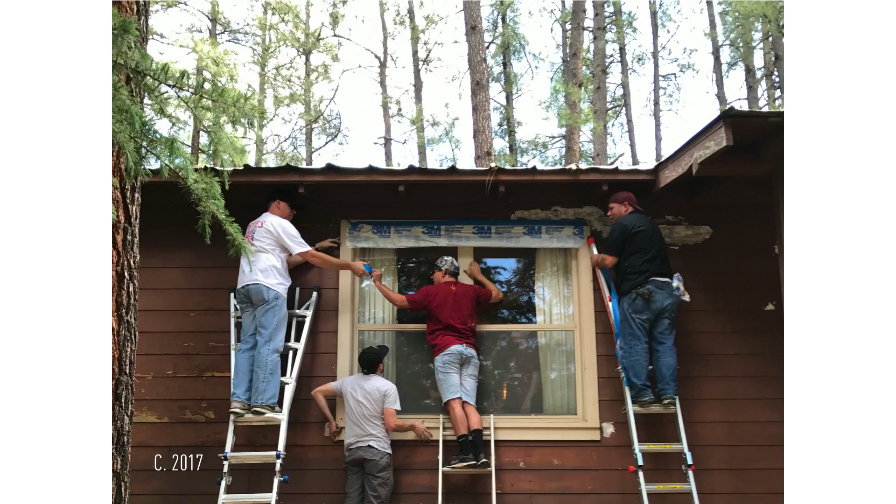This past summer, my cousins and I met at the cabin to repaint the exterior. Lindsay, my wife, and I now take our children to the cabin every summer for a couple of weeks.

As I mentioned, I'm a graduate of Berkeley. While I studied here, I was greatly impressed by the shingle-style architecture in Berkeley, which has excellent examples. It pervades throughout the Bay Area. This is a Julia Morgan that's still, of course, here. I think the ballet actually occupies this building.

I also worked professionally in Berkeley at the offices of Bohlin Cywinski Jackson, an architecture firm that now is in San Francisco. During that time, I was assigned to a residential design project called the Creekside House near Palo Alto. The client's primary concern was to preserve the large 100-year-old oak trees that stood on the property. A strategy to prop up the branches of the tree was designed and implemented. The house tucks under the oak canopy, and the house is framed and lined with timber. These early experiences were instrumental in forming an intuition and technical expertise in timber construction.

And more importantly, however, as we are emotional beings, and I'm probably more emotional than most, as this is a sentimental beginning, this formed the beginnings of my strong belief that buildings should be wood.

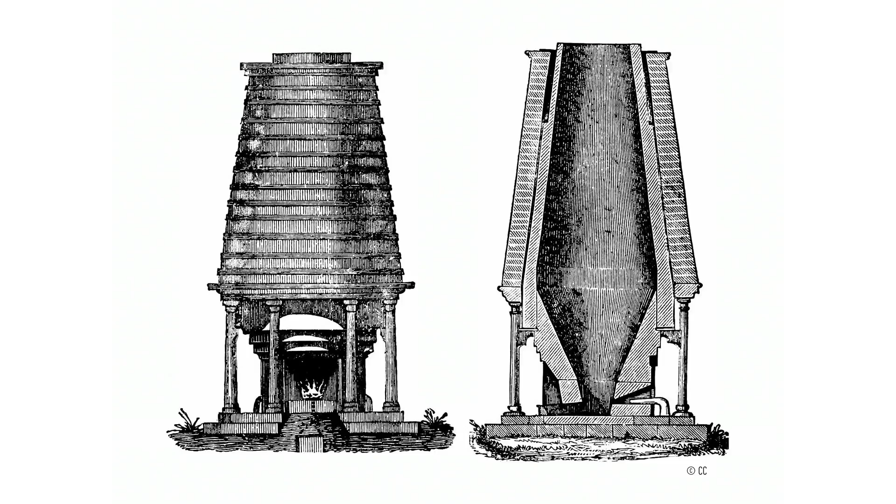But why in the 21st century is it time for timber commercial construction? The Industrial Revolution brought about standardization and mechanization. The blast furnace process allowed for iron ore to be smelted affordably, leading to the mass production of steel, from nails to large structural beams. Steel saws could cut logs, and laborers could nail together boards faster and more affordably than ever before. And light wood frame for single-family houses became favored above brick and stone masonry.

About this time, the process for refining Portland cement, the binder in concrete, was invented in the UK. While wood emerged out of the Industrial Revolution as the material of houses, steel and concrete became the material of commercial construction, favored for their longer spans, durability, and what was perceived as non-combustibility.

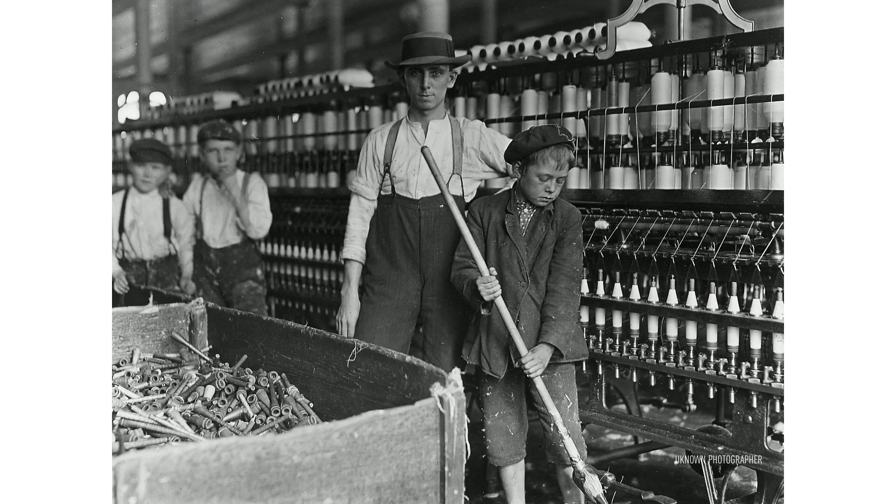However, the consequences of the Industrial Revolution were not systematically or systemically considered. Ulrich Beck, the late German social scientist, suggests that we wrestle today with the side effects of yesterday's successes, that we are in a new phase of modernity today, in which our mode of operation, such as building, can be characterized by the development and implementation of contextual systems of increasing hazard. He says that our belief that society can somehow control the dangers that itself produces is self-defeating.

While steel and concrete can certainly solve performance parameters of building, they have unintended, unknowingly environmental and social contingencies and consequences. We're all aware of the mounting natural hazards. You've been a recipient of one most recently. There's also the tragedies in Texas, in Florida, Puerto Rico.

Given the secondhand effects of the Industrial Revolution, policymakers and those in the building industry, like myself, are for the first time in my memory and in the study of history of building, seriously considering not only the operational performance of buildings, but the impact of material selection on climate change mitigation. This awareness has propelled timber to the forefront as an innovative construction material of the 21st century among ecologically conscious owners, architects, engineers, and builders.

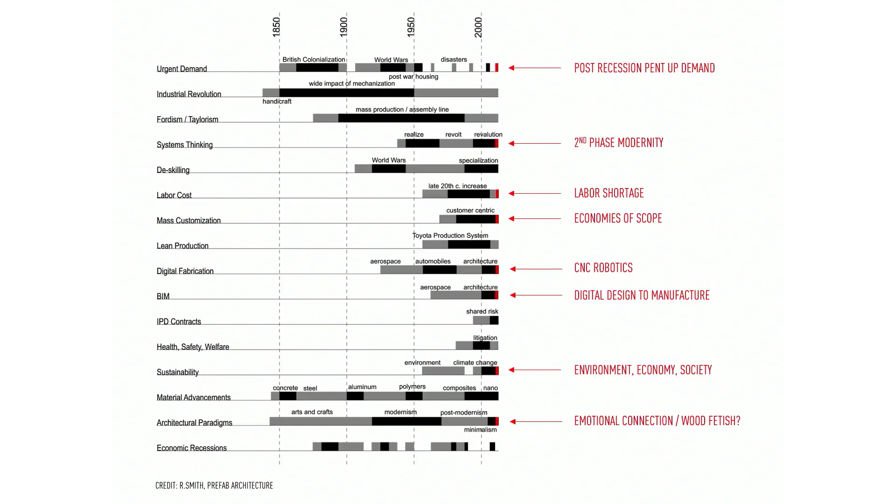And finally, and I think probably most importantly, we as emotional human beings are tied to aesthetics and other sensory components. And so I think one of the major reasons that wood is pervading is because architects seem to currently have a wood fetish. This is also dangerous because we had a concrete fetish in the middle of the 20th century. Where this will lead, I'm not quite sure.

I run a research center at the University of Utah, as the dean mentioned. We focus on how buildings are built and the contingent social and environmental and economic implications of such. This has led us to wood and industrialized building as two primary topics.

The center at the University of Utah is located in Salt Lake City, and due to the influx of high-tech companies such as IM Flash, Adobe, and yes, the US National Security Agency, coupled with the reality that much of the population stays in Utah and reproduces prolifically, the Salt Lake Valley is one of the fastest growing regions in the United States.

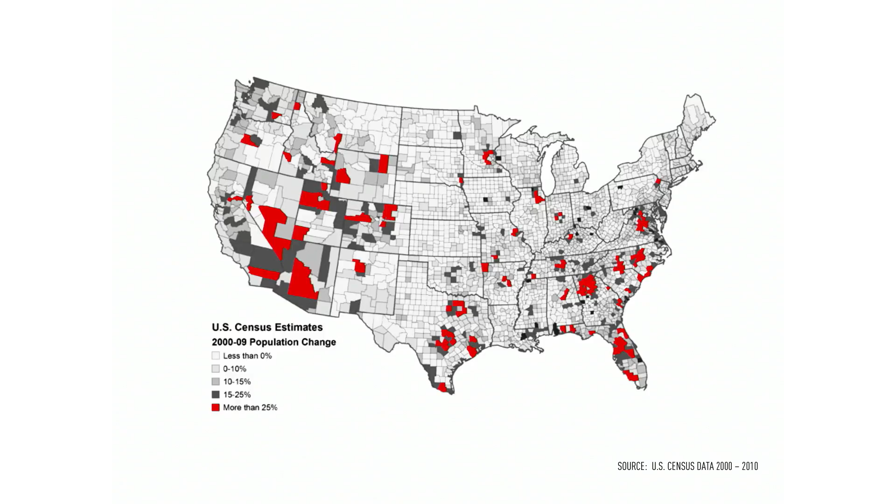It's estimated by 2030, the number of housing units in the Salt Lake Valley will double what it is currently. Housing trends indicate these 750,000 units will come by way of low-rise multifamily apartments, condos, and affordable housing projects. This presents all kinds of planning and development questions, challenges, and opportunities, not the least of which is, how will these buildings actually be built?

We explored the potential of construction materials that were currently not recycled or reused that perhaps could be used in that way. This brought us to the Utah State construction and demolition waste data. These numbers from 2008 demonstrate that concrete and mixed concrete rubble constitute the majority of construction and demolition waste in Utah by volume. Outside of crushing concrete into aggregate or pulverizing it into road base or road refines, it's really difficult to reuse. Metals, including steel, are already recycled nearly completely, nearly 100%.

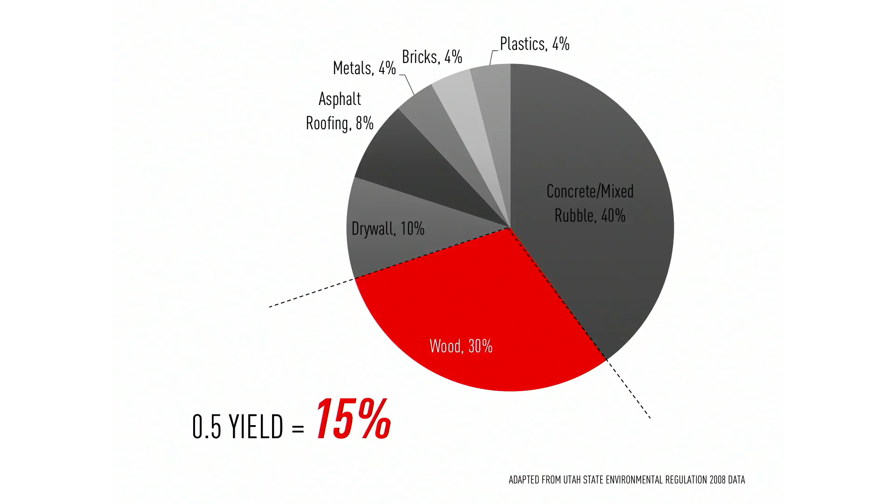Wood is the only other structural material option currently in that waste stream. Research precedent indicates there's a 0.5 yield on recycled wood, meaning that of the wood volume going into the landfill by virtue of demolishing old buildings, only about half has historically been able to be reclaimed and reused functionally. But the literature only showed case studies of reuse for wood in finished applications, such as wood floors, cladding on the outside of buildings, or wood lining on the interior. There were no examples of using it as a structural material.

Even if wood is not recycled, such as using new virgin material, it really is the only rapidly renewable material that could be used as a structure. Wood as a raw material brought to use is a relatively low embodied energy material. This means the amount of energy imbued in the material during harvesting, processing, and transport is low compared to, say, metals. This is positive because energy in this country is primarily generated by coal-fired power plants, which presents a challenge for both pollution and CO2 greenhouse gas emissions, linked to climate change.

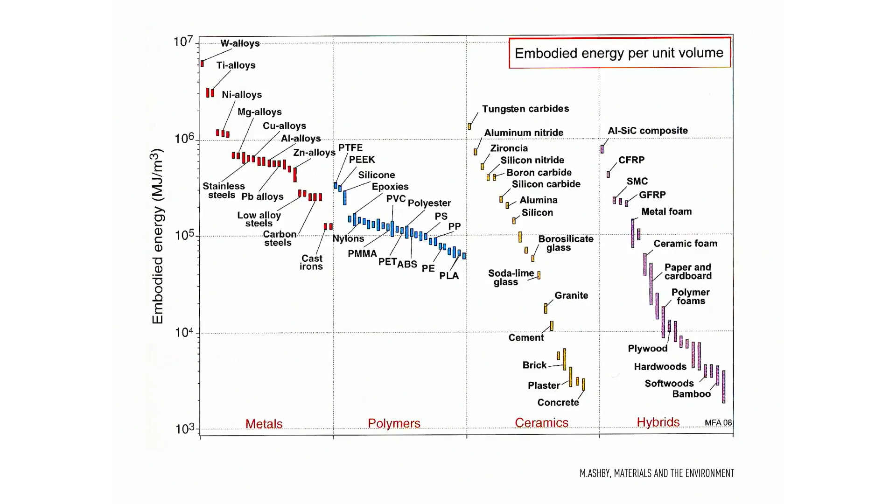You can see that wood is also a low embodied energy material, but that does not account for the carbon sequestration that occurs during the growth cycle of trees. Bruce Lippke, a colleague at CORRIM at the University of Washington, has dedicated his life to working out life cycle assessments in wood. He's compared this to other materials, such as concrete. This image shows the net carbon emissions of wall assemblies, illustrating that wood is a net carbon sequesterer.

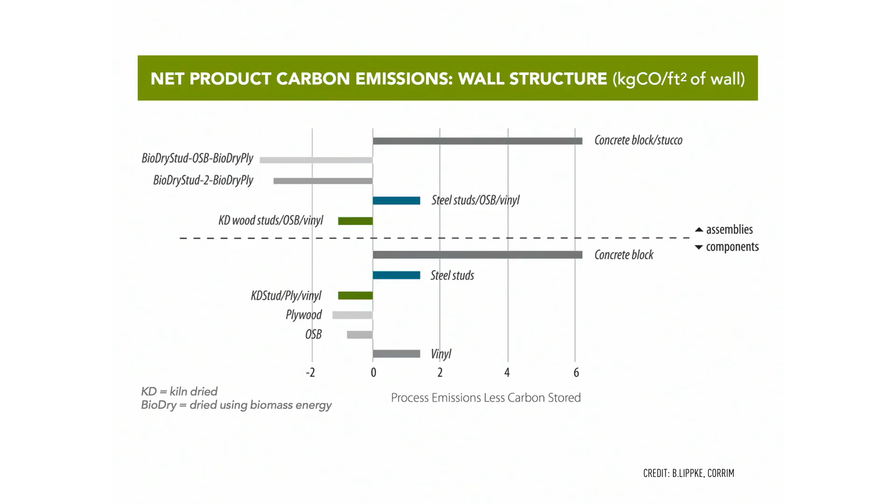Because timber has low embodied energy, is net carbon sequestering, and can be reused and recycled, we became interested in a product that could take some of the deficiencies of construction and demolition waste, or underutilized wood in general, and increase its capacity, such as structural capacity or durability, by reconstituting it into a value-added product. One product, cross-laminated timber, has been in existence for some 20-25 years, emerging out of the Technical University in Graz, Austria.

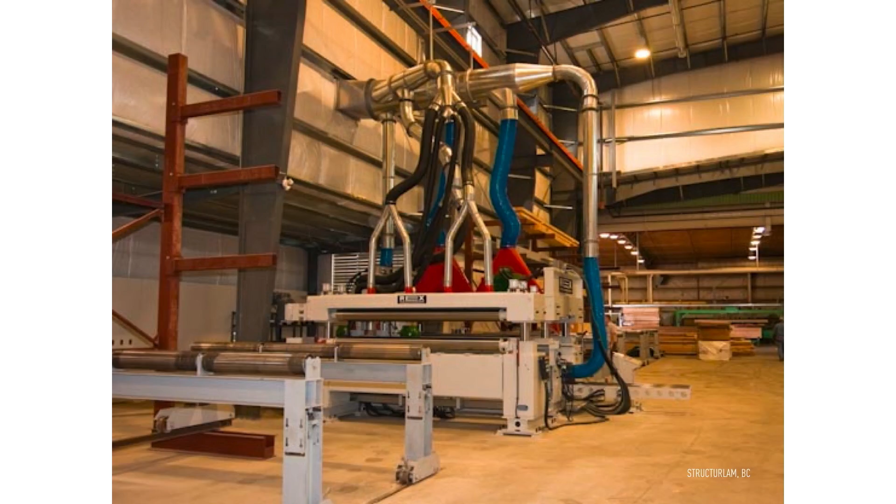Developed by Dr. Gerhard Schickhofer, we could theoretically reuse waste wood in the construction demolition stream into this new product by glue laminating it into rafting layers, such as plywood, but using dimensional lumber sizes. But this presented challenges with the initial cost of glue laminated presses and the capital expenditure investment of large format planers and sanders that the wide majority of timber fabricators across North America do not have access to.

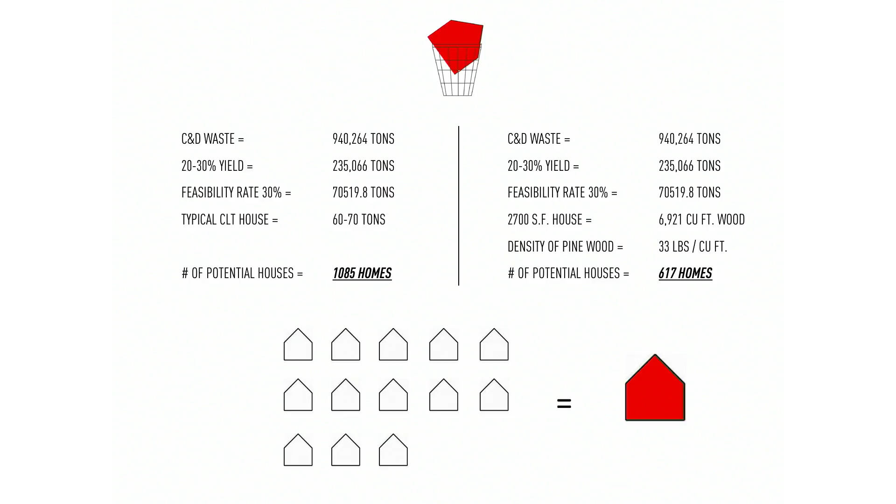Furthermore, there was a challenge of actually creating a wood reuse supply chain. We estimated it would take an average of 13 homes demolished to create one cross-laminated timber house from construction and demolition waste. This is calculated both in mass and volume. So in any given year, the market would only be able to build about 600 to 1,000 homes from the construction demolition waste going into the landfill. This really didn't meet the demand of the 2030 benchmark in Salt Lake of needing to double its housing stock.

In 2009, we learned of the mountain beetle problem in the Intermountain West forests. This was also a waste wood that, like construction and demolition waste, was an opportunity to make lemonade out of lemons, to add value to what otherwise was unused. Now certainly beetle-killed pine can be used for biomass, but in our estimation this is a lower value use of the product. We began exploring the opportunity to create a structural building product like cross-laminated timber, but at a lower cost for entry for timber fabricators that did not rely upon expensive machines, such as presses and planers.

I'm sure you're all aware, probably much more than I am, about the mountain pine beetle devastation that occurred. But just to remind ourselves, it damaged most of the intermountain forests. California was not immune to this.

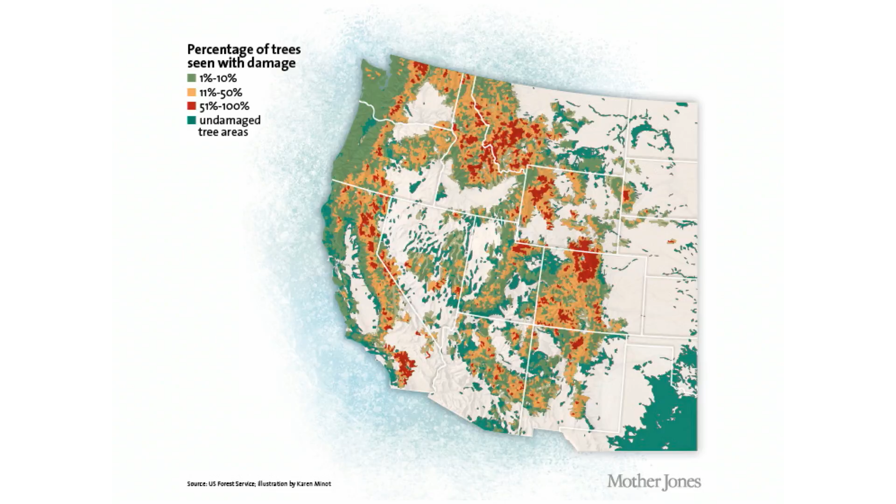We know that bark beetle infestations are exacerbated by longer mating seasons and warmer temperatures that dry out forests. Although the mountain pine beetle epidemic is slowly subsiding, according to Colorado State University, the spruce beetle is now kicking up. We estimated that the amount of forest infected in Colorado alone would produce over 2 million housing units, well over market demand, which could help meet the rapid population expansion in the Intermountain corridor.

We could also aid the Forest Service in removing standing dead trees and create value for the forest sector. At the same time, Euclid Timber, a local fabricator in Provo Canyon on the back of the Wasatch Mountain Range, was exploring mass timber products and logging beetle-killed standing dead material from local landowners' properties. They invited us to participate in their R&D and testing as a university partner, along with Brigham Young University and Acute Engineering, a timber engineer in Utah.

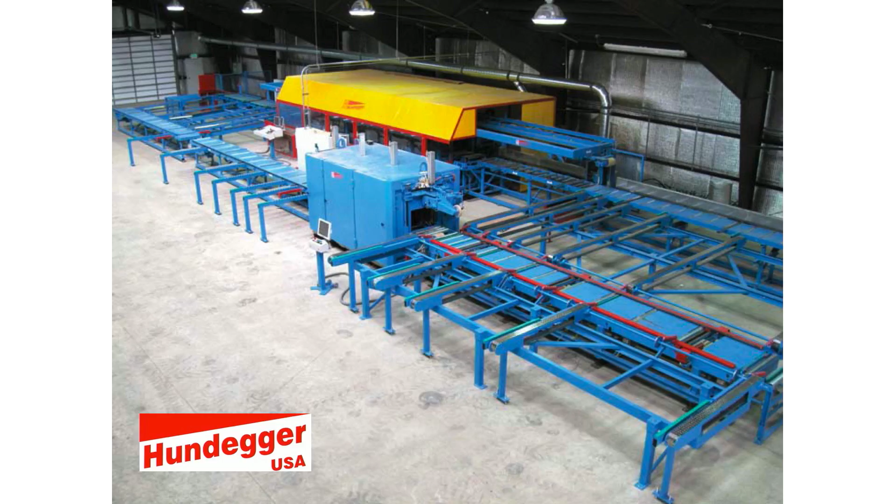Euclid Timber's owner, Kip Apostel, speaks German and is well connected to the Central European wood building industry. He also owns a co-located Hundegger USA on the same property. Hundegger is the Rolls-Royce of CNC wood fabrication machines. In addition to having these tools in their shop, Euclid/Hundegger retails, supplies, and maintains Hundegger machines throughout the United States.

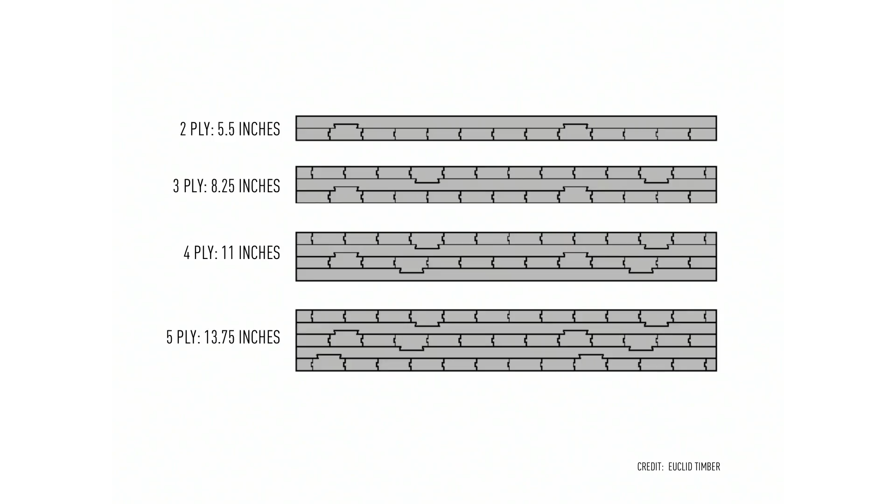The team developed a series of interlocking cross-laminated timber, or ICLT, wall assemblies from 2 to 5 layers, 5.5 to 13.75 inches in thickness. Like CLT, the system uses rafting layers of alternating beetle-killed pine lumber, 3-inch thick boards air dried to about 10 to 12%, plus or minus 2%. The boards are then tooled with a dovetail notch so each layer nests into the next layer.

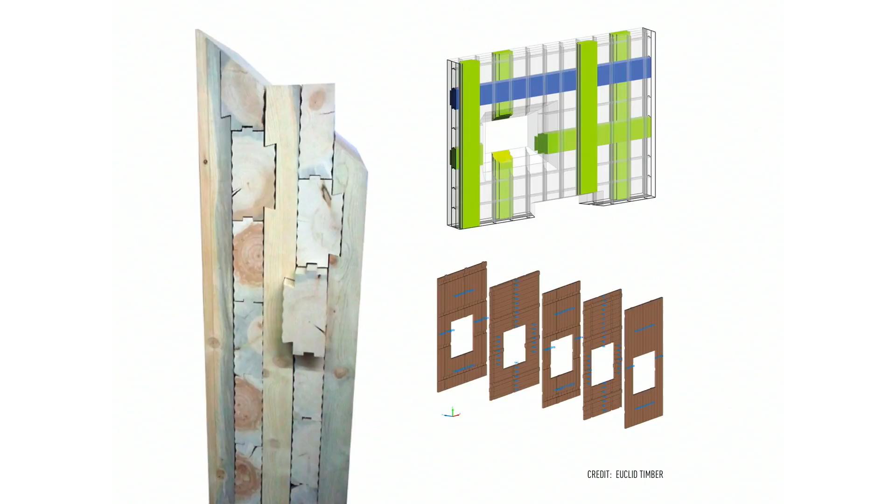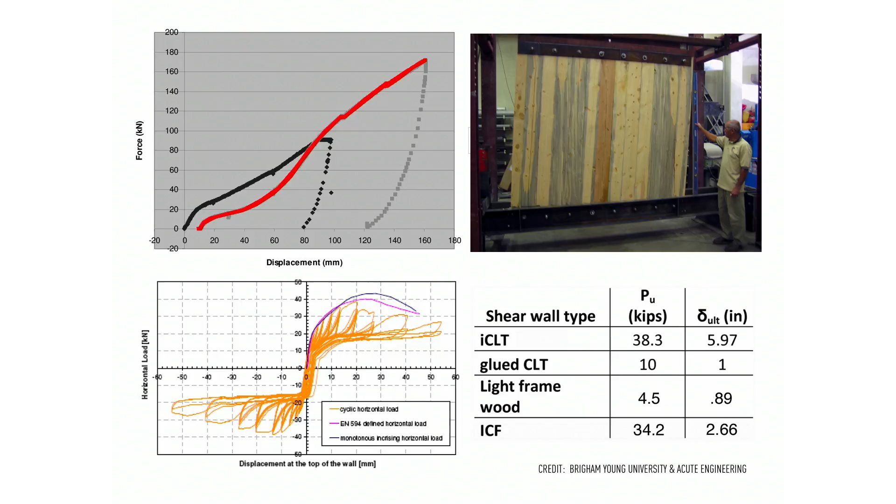The ICLT walls were tested at a pushover actuator test at Brigham Young University, serving a number of civil engineering master's thesis projects. The walls perform similar to reinforced concrete for lateral resistance, but have a large deflection. This would serve well in high seismic or wind zones, meaning it's safe for egress, but the finish damages occurring in the event would cause economic problems, such as cracking of sheetrock.

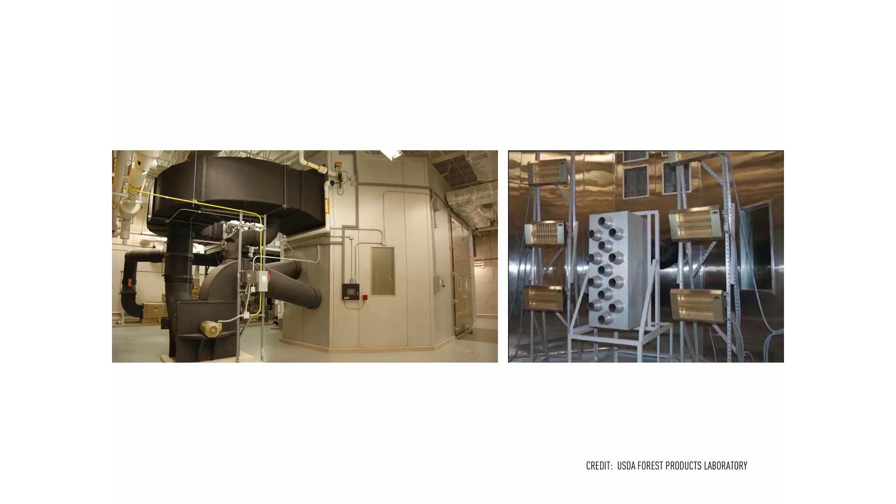The walls have also been tested at the USDA Forest Products Laboratory in Madison, Wisconsin, with the help of building physicist Sam Glass. The facility is known as the car wash. It's a weather and temperature simulator whereby the wall element is a mediating surface between simulated weather and interior environment. Sensors monitor relative humidity and temperature, and the appropriate architectural detail is to conceptually capture thermal mass of the wall to the interior.

We tested both vapor-open mineral insulation and vapor-tight insulation, such as polymer-based extruded polystyrene, on the exterior surface. Our hypothesis was verified that, similar to CLT, ICLT needed vapor-open insulation to allow the wood wall to breathe. We also discovered that while CLT with adhesives is able to resist air infiltration, ICLT without adhesives needed an air barrier. Without it, no amount of mass or insulation would matter for its thermal performance.

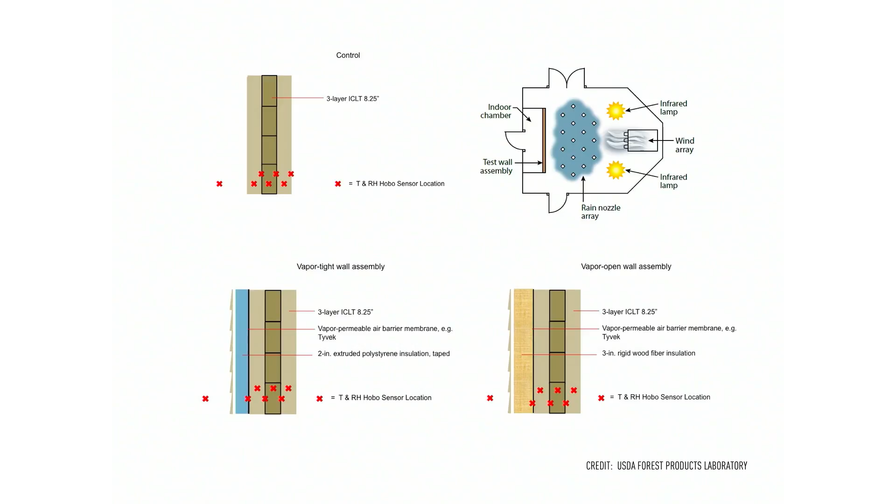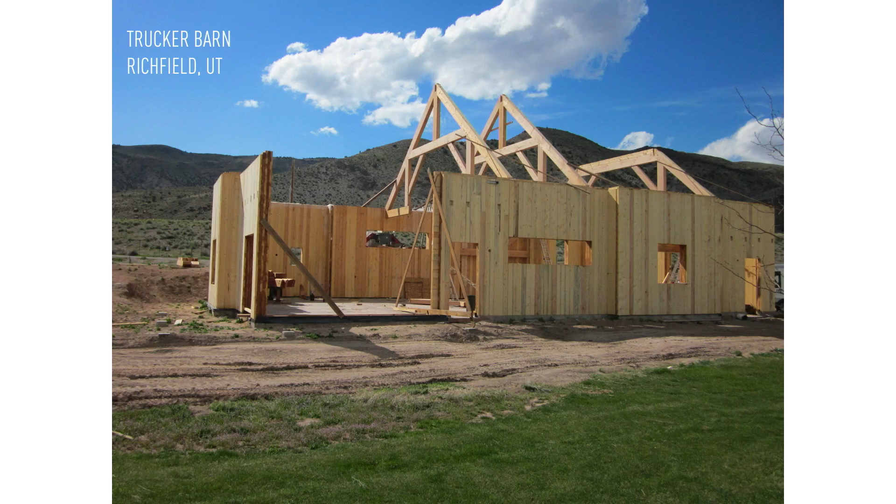Once the hygrothermal testing was done, a lot of these projects were built, and I'll go through a few examples. This is a trucker barn—a funny, slightly counterintuitive story. A trucker on a major highway in Utah wanted a place where he could park his truck and live, and there's a golf course next door.

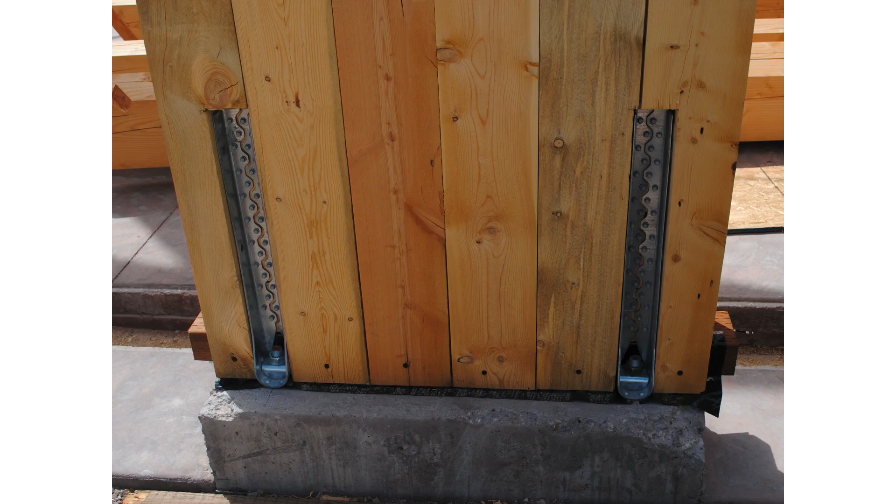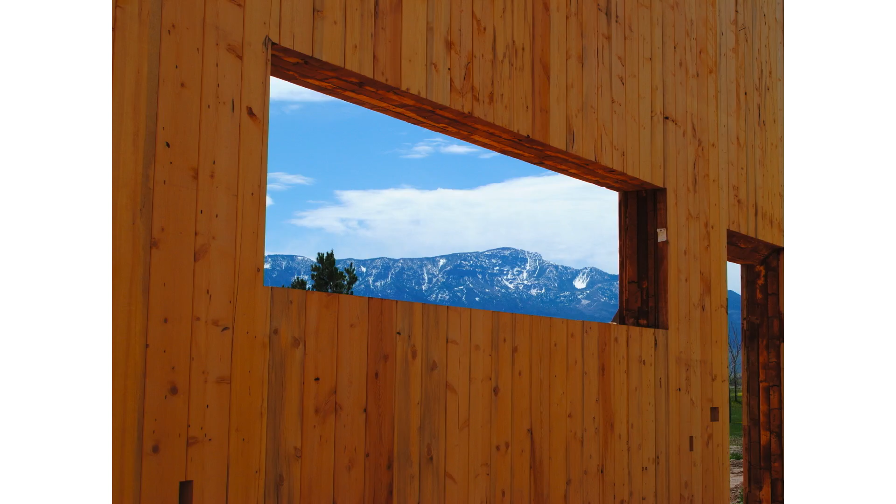These are some of the hold-downs for the wall panel. You can see there are no posts, as you would see in standard construction where you engage a post—these are just drilled directly into the wall. There's no header over a window; you just place the dovetail joints or notches on the layers over those openings so they can span over large openings. You can see some of the trusses, and in this case Euclid Timber developed what's called a dowel laminated panel for the roof, which I'll describe later.

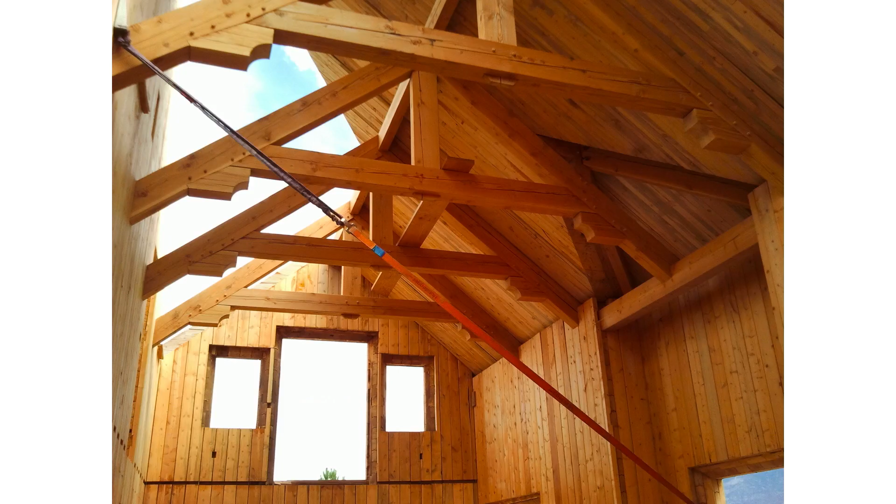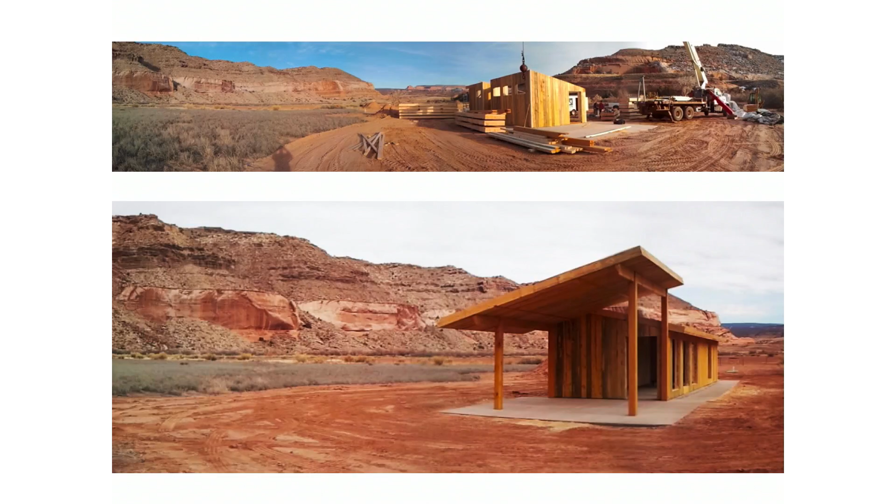This is a project down in southern Utah near Moab called Rio Mesa Center. I served as its research director for a few years, trying to get other disciplines engaged. It's a biological and natural sciences research center. They have tents you can stay in, but there are no bathroom facilities, so we were charged with coming up with this idea, in partnership with an architecture firm and a construction company. Euclid Timber was able to fabricate and build this bathhouse, which holds 3 showers, 3 toilets, and a sink facility.

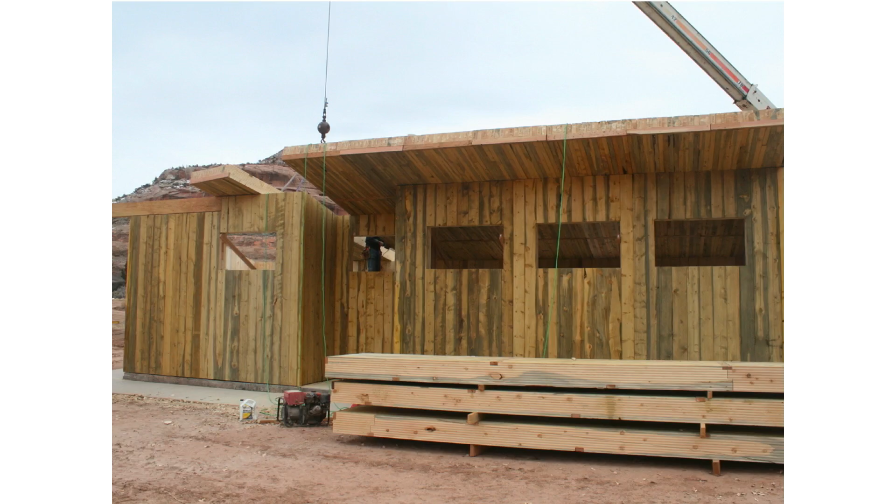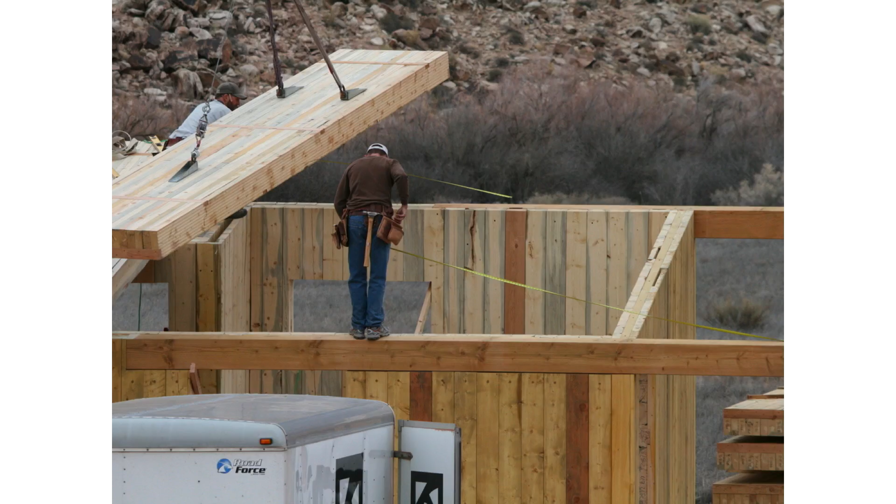You can see it's beetle-killed pine. We then did a water-based clear lacquer on the outside so the wood could still breathe, and furred out on the interior to house all the plumbing while leaving the wood structural panel exposed on the exterior. This is an off-grid project, so all the water, solar hot water, and power come through the roof. You can stay there for $20 a night if you want to—it's in the Red Rock country of Utah.

Project for the Girl Scouts of Utah. This was with my colleague Jörg Rügemer and Erin Carraher, who were designers on the project.

The idea was to engage the Girl Scouts in a meaningful activity so that we could increase our diversity in the Utah population among the building disciplines. It's a major issue for us.

So we engaged the Girl Scouts in the design of their cabins for their camp, and the girls came and participated in quite a few events. One in particular was called the Architecture Chicks event, and they all got t-shirts and got to participate in bringing their sleeping bags to our gallery space, laying out in them and seeing how they might occupy space by taping it off on the floor.

We call this bricks and sticks, where they get to think about loads from a building and how wood might deflect. And then there was a panel discussion with some of the prominent women architects in our community.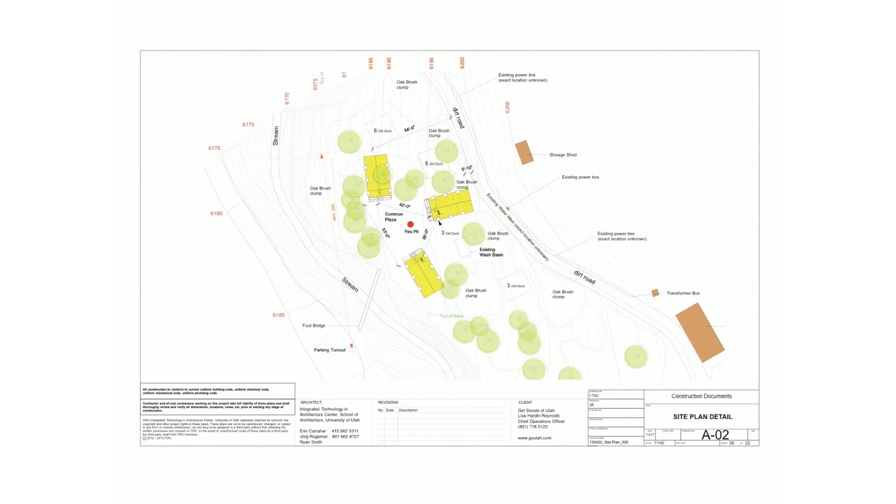We took them to the Euclid Timber Factory, and the girls got to see how wood was manufactured and fabricated with the Hundegger machine. This is the design of the project, 3 cabins built to date.

It's designed in cadwork, which is a timber modeler. All the components and parts are designed that way, and then they're fed to the machine digitally, and the machine then cuts them. This is a little bit unique panel.

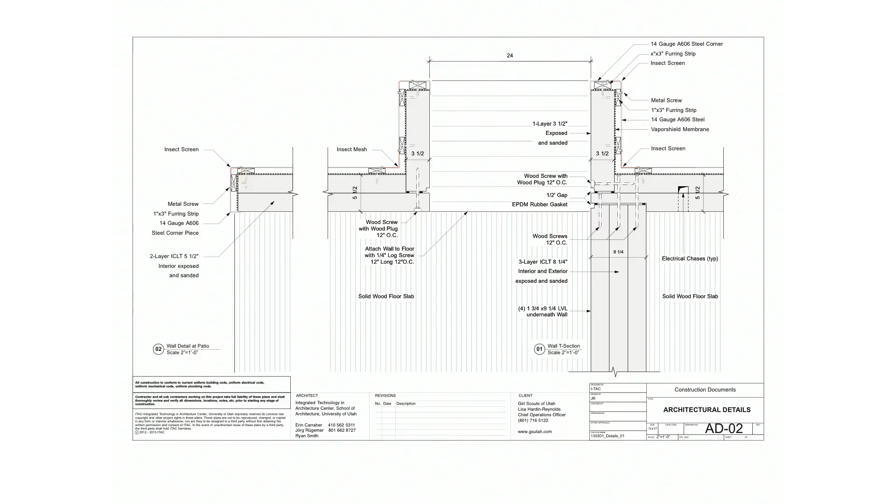It was a 2-layer panel, and you'll see how the construction kind of worked. This is a summer cabin, so it has no insulation. It's only used during the summer.

The walls sit down on top of the floor through this dovetail joint.

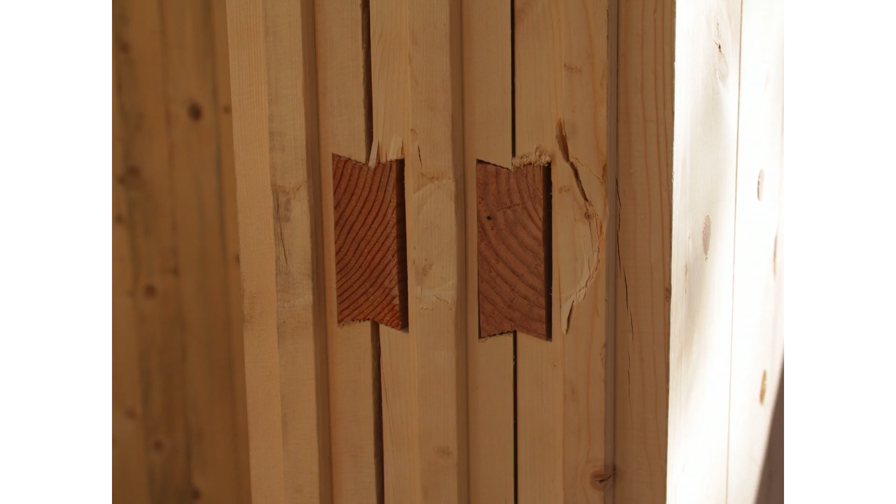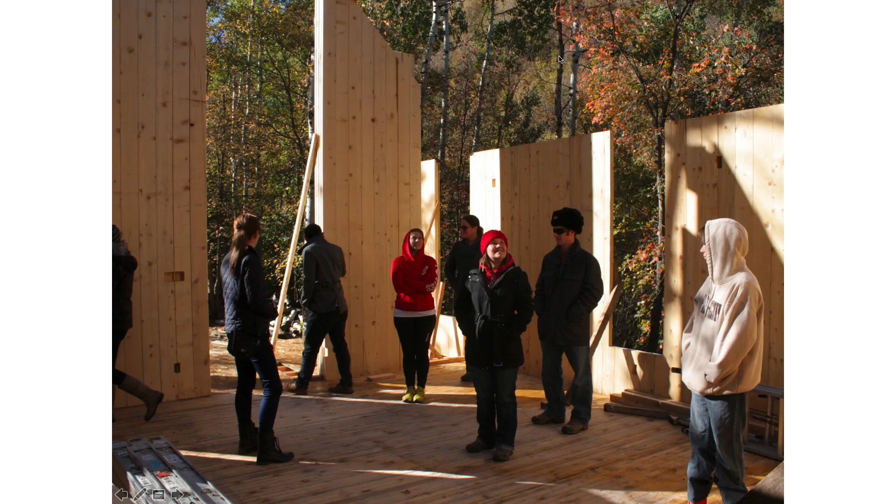And then it's a little bit different twist. It's a bow tie notch that's driven across those 2 layers of panels. So you have 1, 2, and then it's driven across to, in that case, those are 3, but we have 2 and 3. Here's some of the architecture students visiting the job site.

Getting firsthand knowledge of how mass timber construction works.

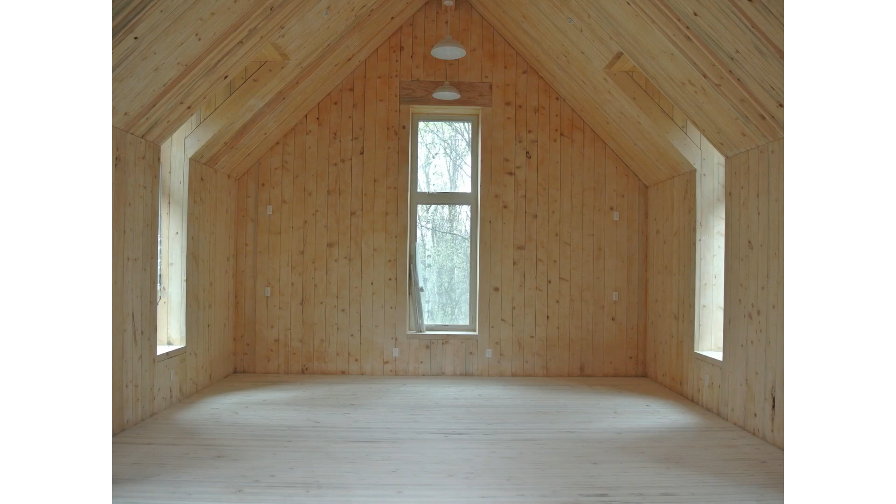We did have some problems with pitch, but I won't go into that. The wood didn't go through a full seasonal cycle of drying, so we had some problems with pitch. It was just clad with a simple mild steel and a weather barrier between them.

My son, when I took him to this project, he is a Boy Scout, and he said, "This is just not fair."

You can see how many girls can fit into a cabin, and Erin Carraher led a studio where they designed all the seating and tables for each of the cabin meeting spaces in the center. So the architecture students built those as well.

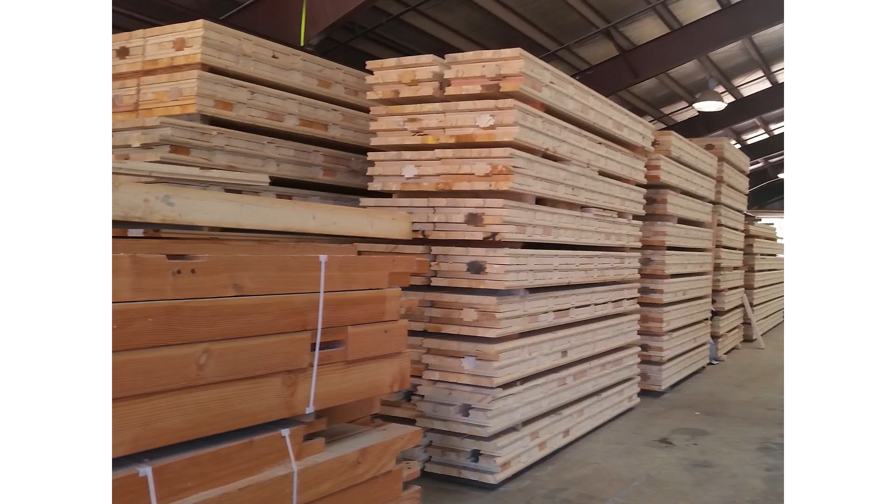Euclid Timber currently holds patent and license on the product, and this is their process. They now produce 2.5 width, what they're calling billets or blanks, and you can order them mass produced, and they stock them so they can supply them.

ICLT is part of a family of glued and non-glued mass timber products. This is kind of an image we produced to explain it to people. On the top you have glued products, glue laminated timber, we're all familiar with that. Structural composite lumber, which could include LVL or PSL, and then cross-laminated timber.

On the non-glued side, these are less familiar to people. A product that came out of Germany is called dowel laminated timber. You dry the hardwood dowel down to a very low moisture content compared to the base wood that it's accepting. You drill through, and then when the ambient relative humidity increases, that dowel expands and locks the panel into place.

This is called nail laminated timber. Similar concept, stacked planks, and you nail through them, usually with aluminum nails. Cross nail laminated timber is the same, and that's because then you put it on a flatbed machine, and you can CNC cut windows out of it and just go right through the aluminum nails. And then the ICLT is the product we developed that has no mechanical fasteners or glue.

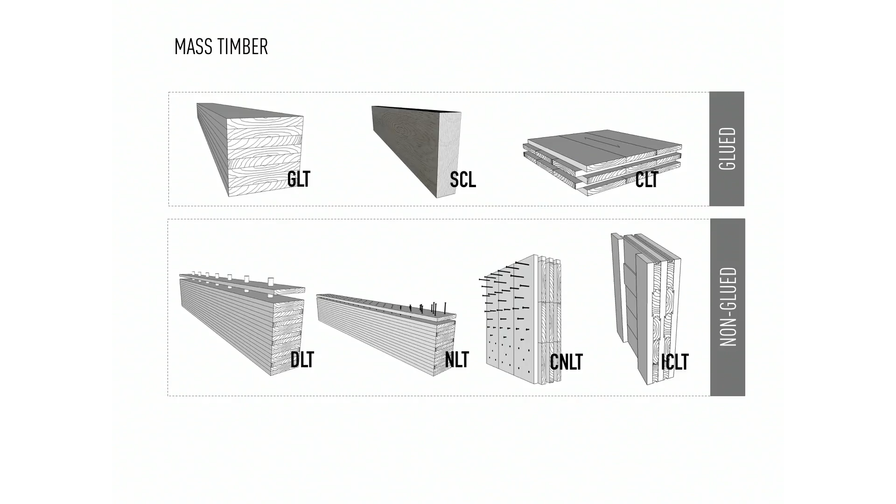Currently, there's about 40 CLT plants that dot Central Europe. There's only 2 producers in Canada of CLT, and we have 2 in the US with another 2 being planned currently. Dowel laminated timber - I don't know how many are in Europe, but in North America we have 2 producers, Euclid Timber in Utah and StructureCraft up in Vancouver. There's a couple of nail laminated timber producers as well.

Hundegger owns the patent on cross nail laminated timber, and they have a specific machine they produce. There are about 20 plants across Central Europe that just produce CNLT product.

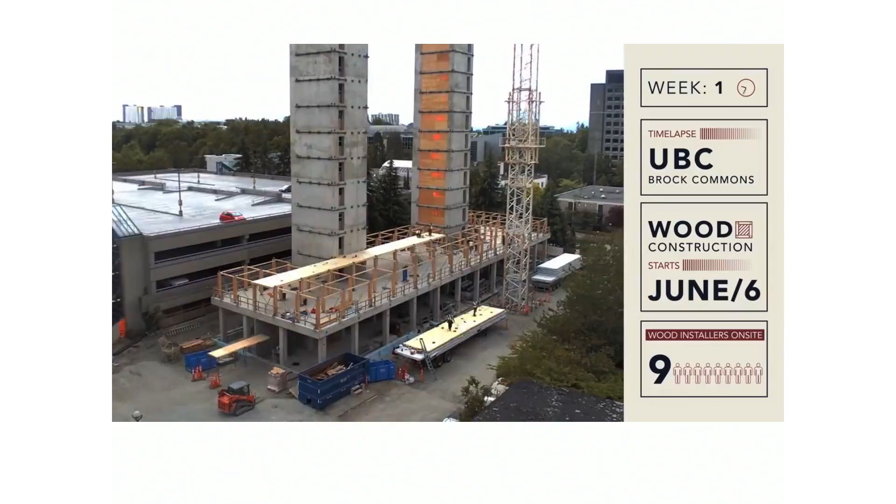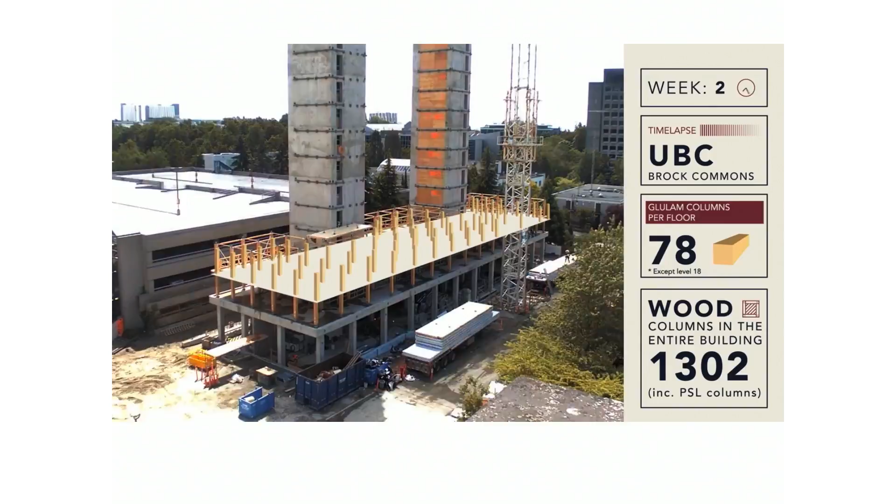If you aren't familiar with cross-laminated timber and where this is going, this is the 18-story project just finished in Vancouver, built out of a hybrid. It uses glue-laminated timbers for the columns and posts, and cross-laminated timbers for the floors. This went up 18 stories. You can see how fast this is - we're in week 2. This is incredibly quick.

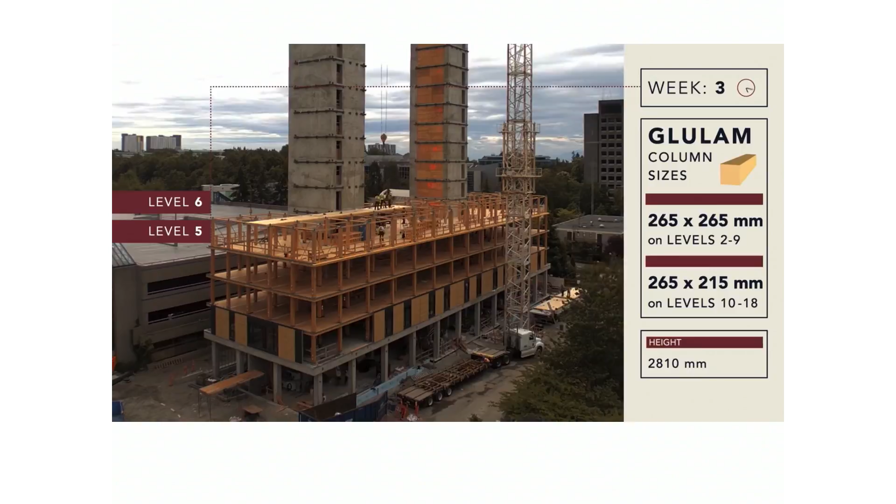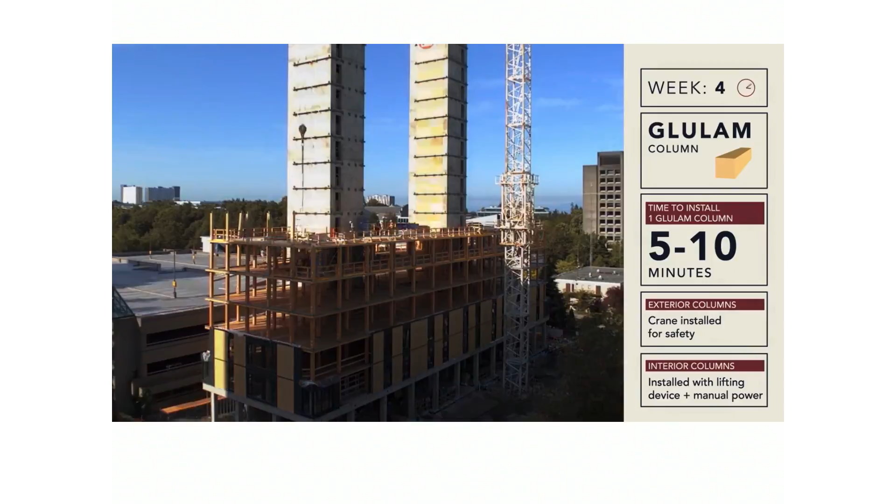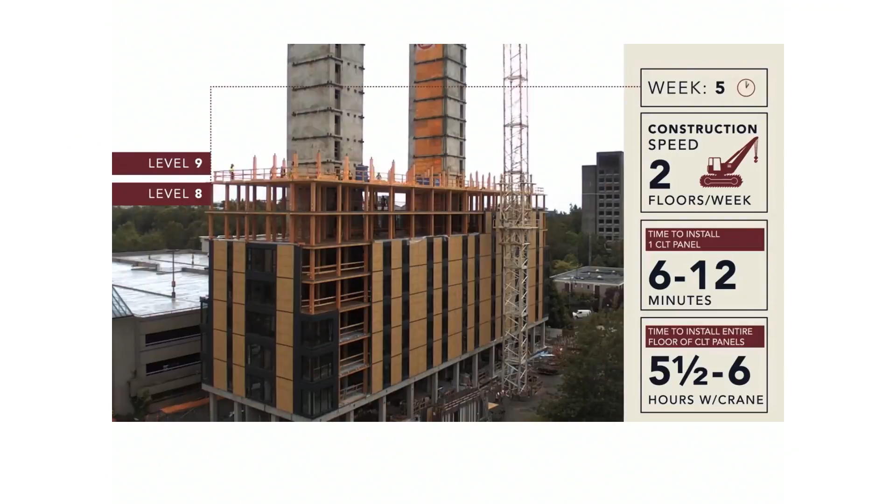So this is the reason people are going this direction. This product comes out of Structurlam, located near Vancouver. This is built for UBC, University of British Columbia. I just got an opportunity to see it two weeks ago, finished. It's pretty incredible - not just is all of this prefabricated, those two stair cores are site cast concrete. That's where the elevators and stairs go. That's for lateral resistance and also fire resistance. And then the whole exterior is a prefabricated cladding system that has embedded windows in it.

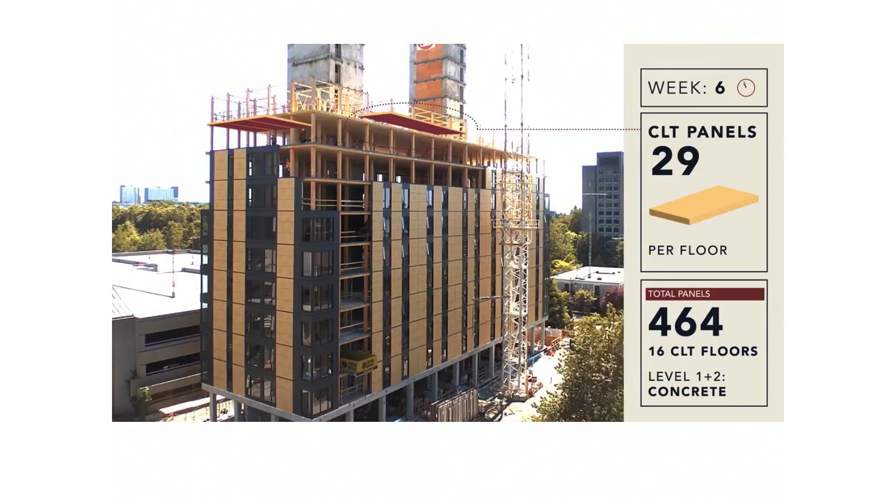I got an opportunity to interact with the superintendent on this project, and she had some great stories to tell. It's highly collaborative between all the players in the project to make this happen.

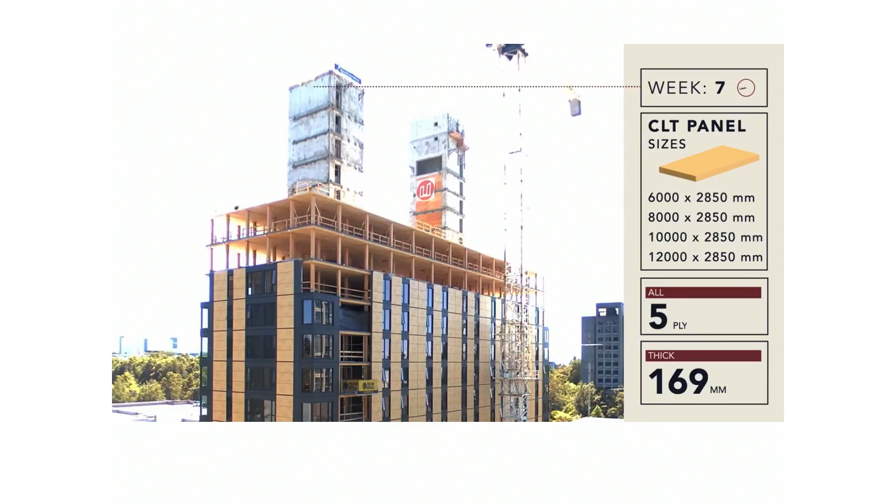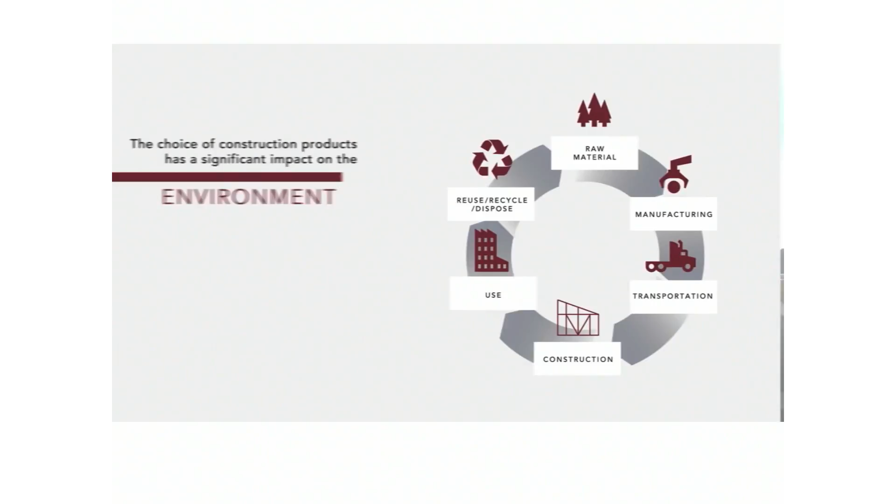I think there's a 17-story project being planned for Portland right now by Lever Architects, and so we'll see much more of this in the US.

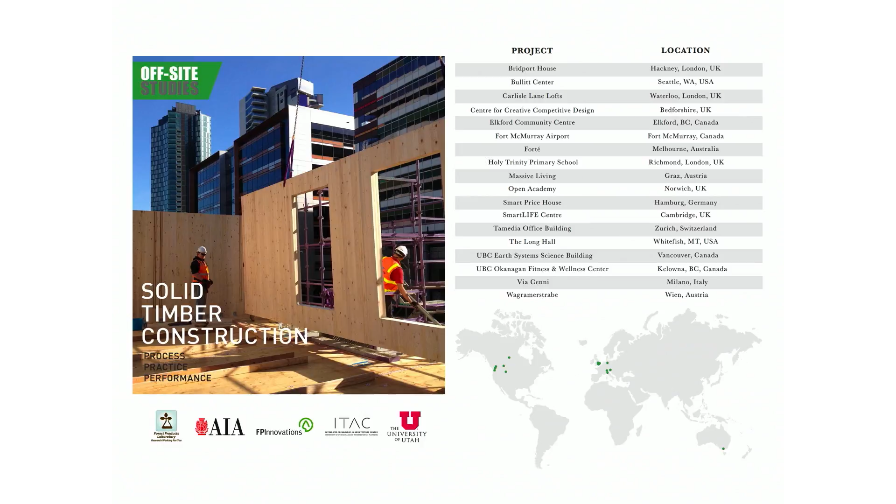We were interested in this product CLT from a kind of research market study perspective. So we took 17 projects, spent 3 years, and documented how they performed - solid mass timber projects - and we compared them against like-for-like developed a system with Cummings Corp, who's a cost estimating firm out of DC, like-for-like projects with these projects. And what we were able to then compare is how they compared in cost, how they compared in time to speed to delivery, cost per square foot.

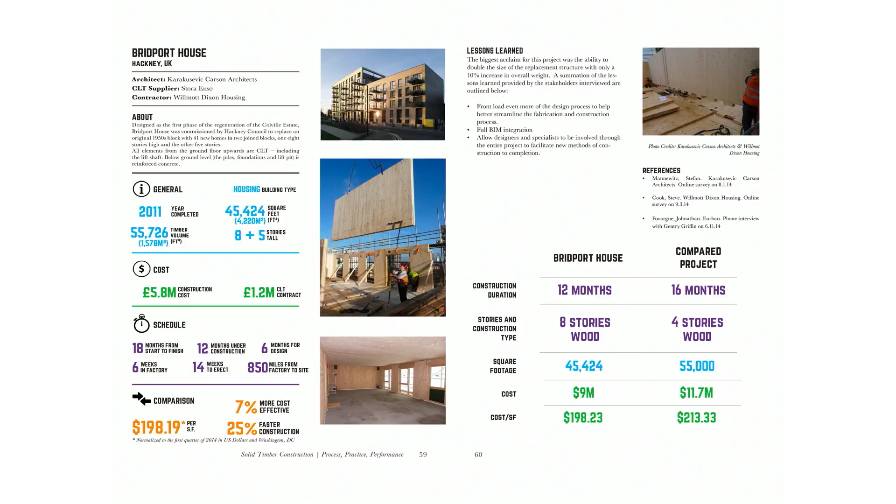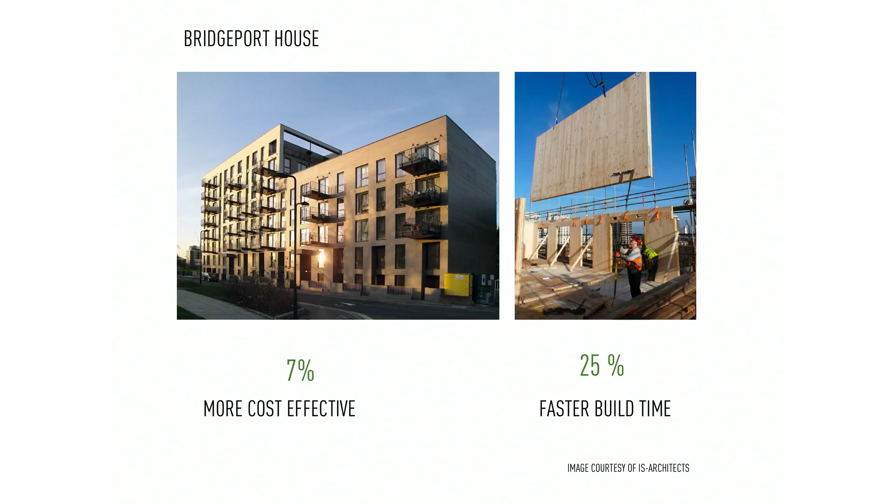What we found across this, for example, Bridport House in the UK was 7% more cost effective than what the industry is building and 25% faster build time. We then broke it down into a number of parameters - you can see the schedule, the number of stories, the amount of square feet. So it does perform quite well.

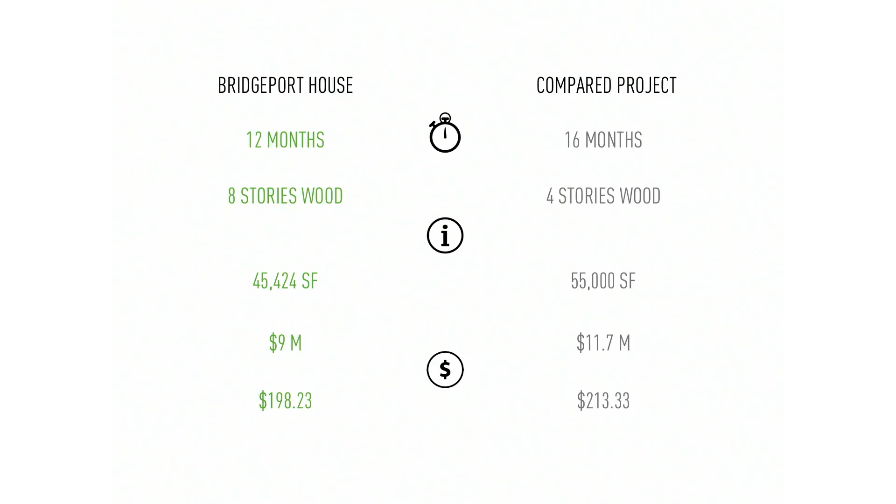The caveat or the limitation in this study is we talked to building stakeholders - we interviewed the architect, we interviewed the fabricator of the CLT, and we interviewed the general contractor to try to triangulate the feedback. If you had a project that went under and did not do well, would you share information? So this is the challenge we had - we got information that we had available.

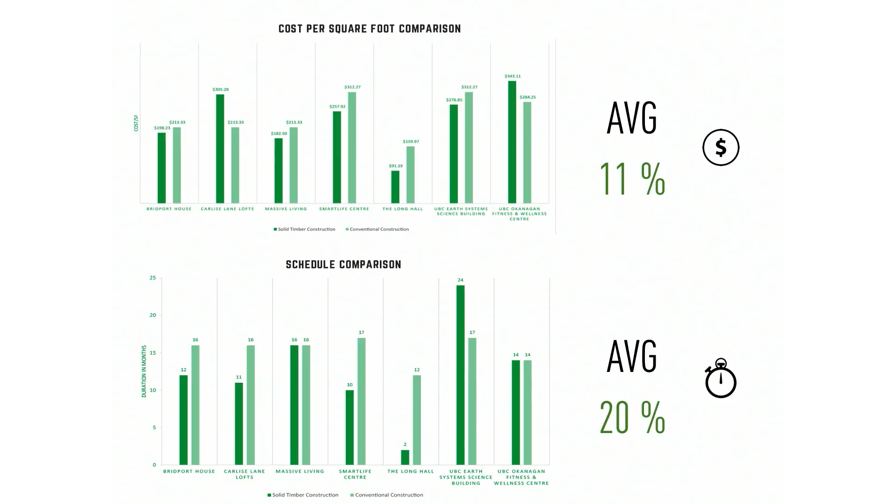Across all those projects, we found about 11% average cost savings, better on construction costs, and 20% schedule advantage. We then went to developers and said, if you had a project that came in 25% faster, or 50% faster, on your general conditions for your construction project, how much money would that save you? We were trying to convince developers to go this direction, use wood mass timber construction. And so you can see there is some savings - we had $52,000 in savings here, $78,000 savings there, on two different projects we looked at, a retail space and an office space.

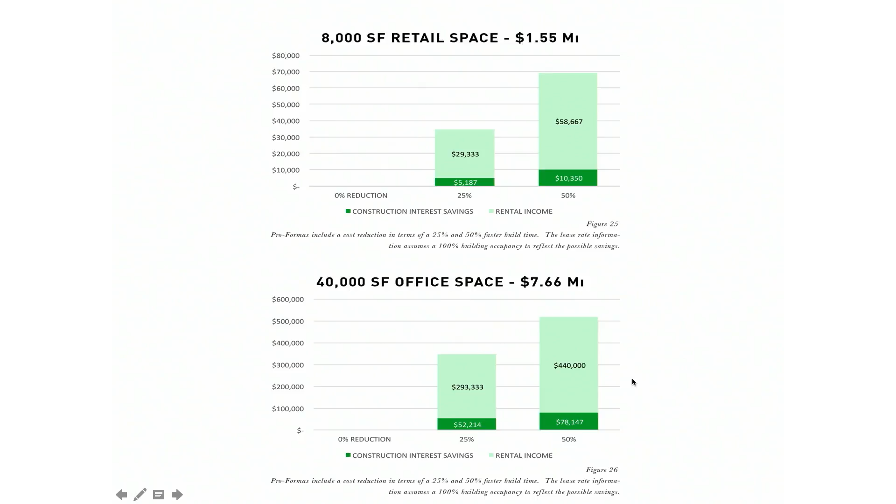Across the market, I mentioned labor is a challenge. And right here, we see that out of the recession, construction volume is up - it's up at the level of pre-recession. So we're building a lot right now across the US. But the labor that's available to meet that demand is just not there, because it fell out during the recession. For instance, the architectural profession is estimated to be some 15% lighter out of the recession.

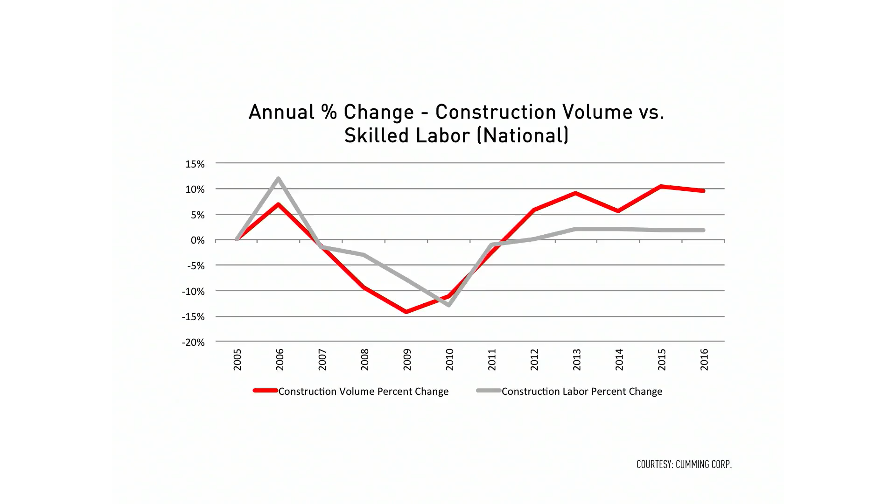What this means for the production of buildings is that we need to bring operations more and more into the factory in order to optimize that labor. Currently, what's called the off-site construction sector, or the industrialized construction sector, is estimated to grow from 3% of the market to 5% of the market in the next 5 years.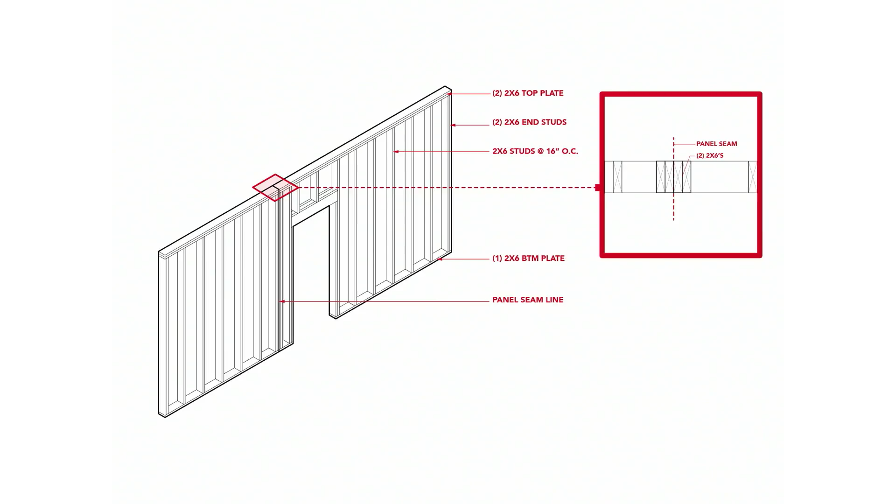Two other products that are emerging that I think are opportunities for wood. One is panelized construction - it's been around a long time. It's essentially to make a wall panel as you normally would on the job site, but do it in a factory. These can be anywhere from 8-foot lengths all the way up to 40-foot lengths, depending on your need.

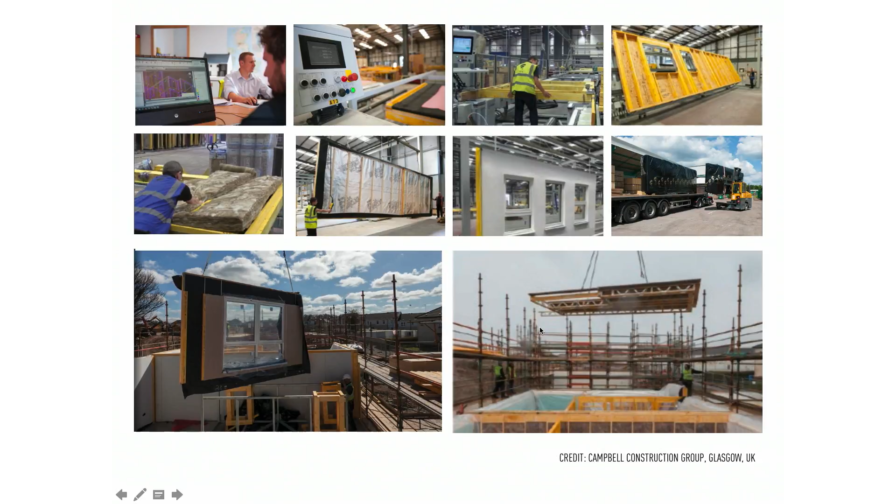In Scotland, this has been perfected. About 75% of all their multifamily housing is built this way. You can see they design it in the computer, it goes over and automated nailers put the wall together. There's a butterfly table that you finish one side and then flip it over and it finishes the other side. You can even put a stucco finish on the outside, and then they're craned into place. They're building handsome, well-designed buildings with brick veneer in the factory.

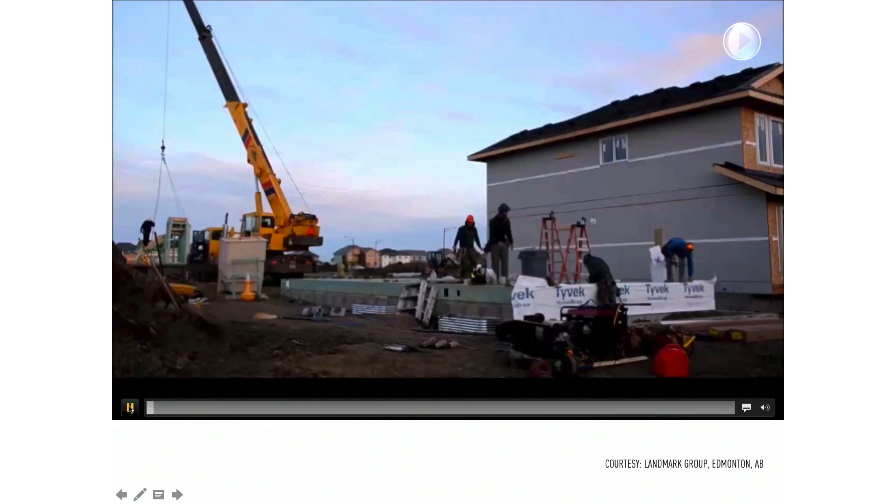Just to show you a single-family house that's being built with panels, I'll show you the first day. That's the porch deck. Siding is already on, and there's spray foam insulation on the inside.

This company is called Landmark Group. Their sister organization is called AccuBuilt. They're located in Edmonton, Alberta. They're the most sophisticated home builder in North America by far. They use all machines out of Germany, a fully automated line, and they produce 6 homes a day.

The most expensive portion of off-site construction in any regard is the crane. So the longer you keep the crane on the job site, the less money you make. So they get as many lifts as they can with that crane, and then they move that crane down in a production development like this to use it on the next house.

There's a floor. This is all one day.

This has been done in Sweden for decades. Post-World War II, they started building this way, and they've just found great efficiencies in doing it. So you cannot buy a home in Sweden that is cheaper site-built than factory-built, and that includes architecturally designed homes.

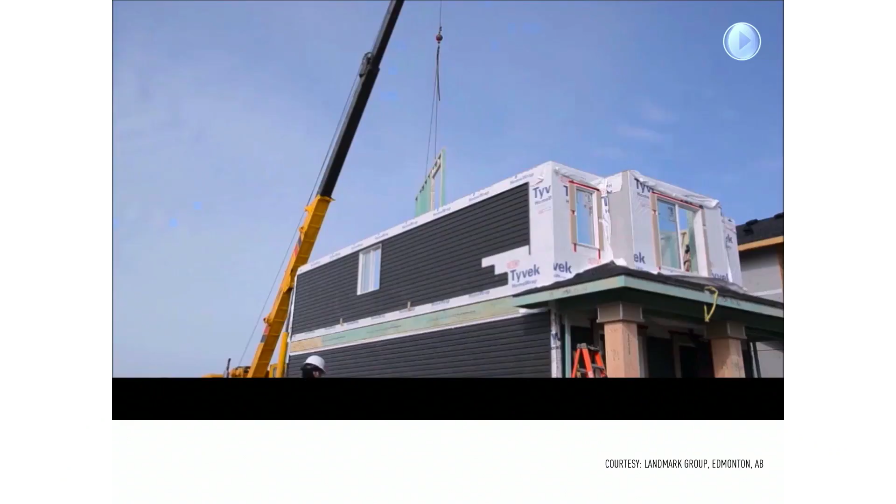The goal set forth by Sweden post-World War II, because of their horrible weather, is you want to get dried in in one day in a house. So the goal is not to have any weather encroach on the interior of the home, because that would disrupt the wood and cause it to warp. We don't seem to care about that in North America, though, so much.

Big modular roof chunks with shingles on the top. I really do believe this is the future of industrialized building. That's day one.

This is called modular construction, or volumetric construction as it's known in the UK. Not to confuse it with mobile homes. This is built to IBC or standard building code. You build a box with all 6 sides, and then you can stack one on top of another.

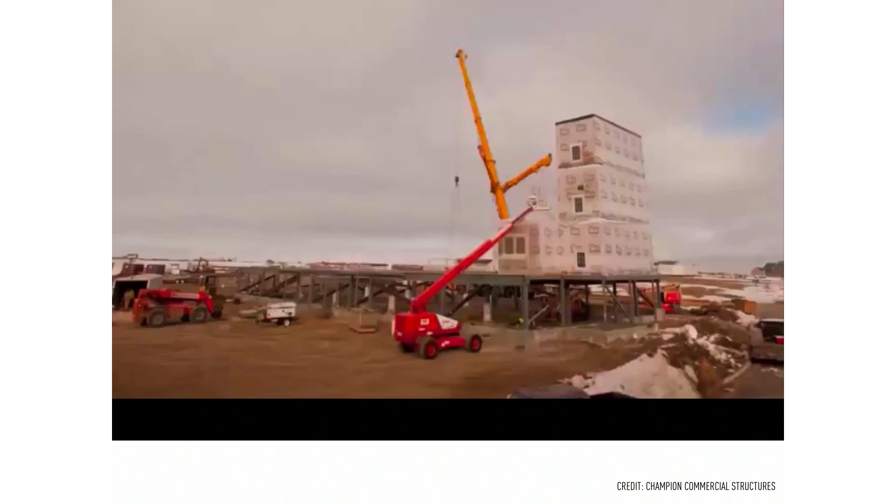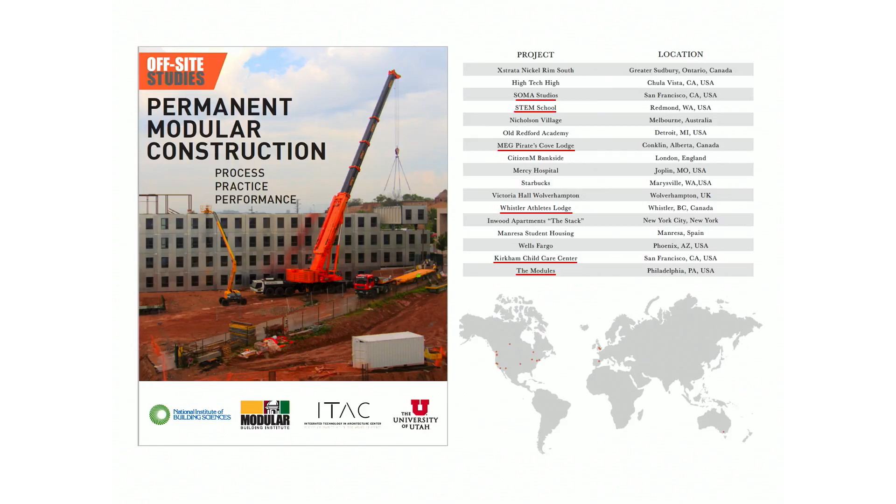That's day one. We did a similar project to the mass timber study in which we took 17 permanent modular construction projects and compared them to site-built or stick-built projects. The ones underlined in red were built in wood; the other ones were in steel or concrete, still modular, but built in other materials.

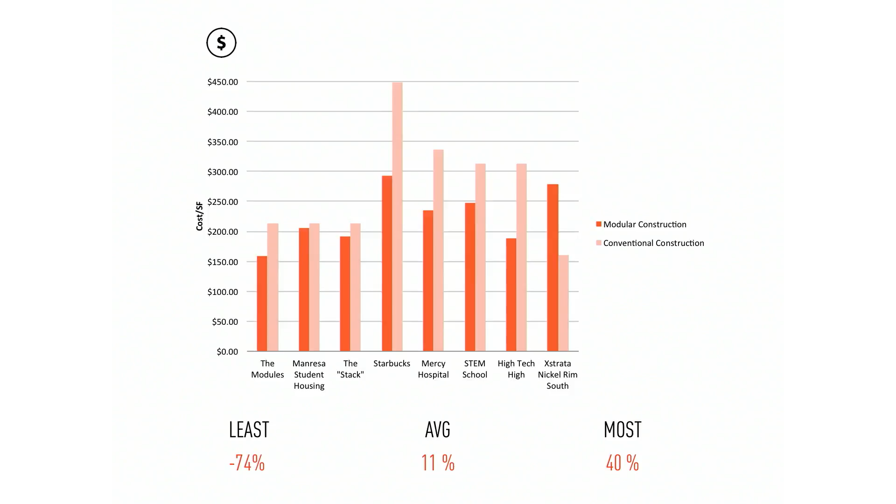What we found is that across the board, we had an average of about 11% cost savings, and an average of 42% schedule savings. It's incredible—it's not uncommon to hear that construction is delivered in half the time with these projects.

We were very interested in all 3 of these technologies: panelized, modular, and standard built. So FP Innovations approached us and asked us to do a study comparing prefabricated wood methods for standard multifamily housing, which is going to dot the Intermountain West and all across the West—no podium, just wood built from the foundation all the way up 4 or 5 stories.

So we took a standard project called the Bud Bailey Apartments by Method Studio Architects, partnered with them, and they gave us all of the data and the BIM model. We set up spreadsheets and algorithms to determine how much wood volume is being used in the project.

We then wanted to model it in panelized and then modular form and compare how much more or less wood volume is used in those projects.

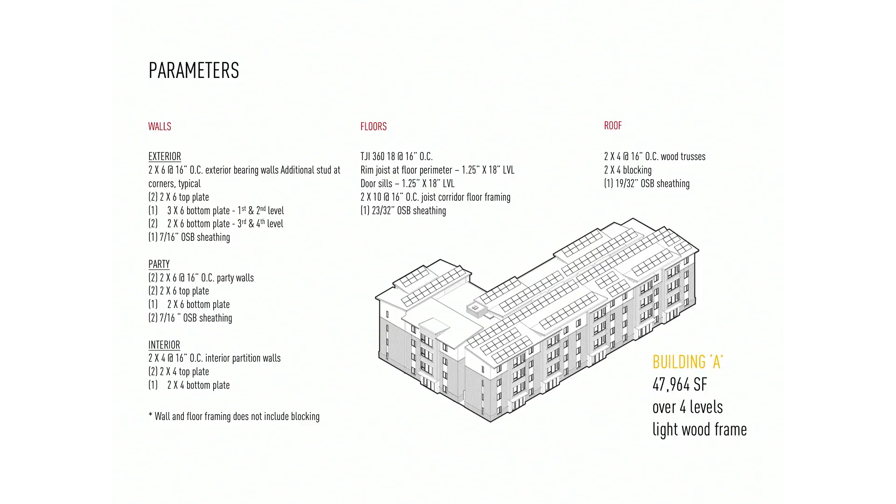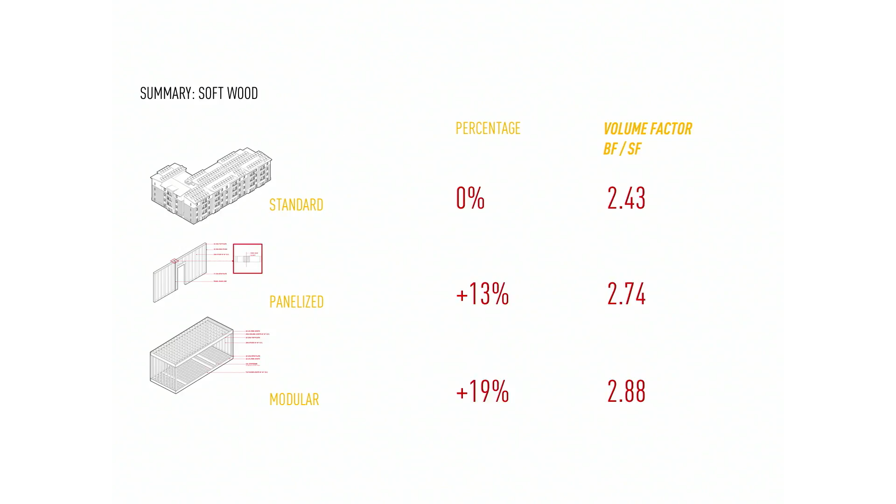What we found is that for softwood only—that's dimensional lumber—standard stick framing on site was 2.43 board feet per square foot, panelized was 2.74, and modular was 2.88. So modular has an increase of 19% wood. Weyerhaeuser would think that's a great idea, right? So I'm sure they're going to do a 'Got Wood' campaign really soon—a 'Got Prefab' campaign really soon.

So where do you make up the difference? Where do you make up the cost difference? It's in labor, right? That's really where the cost is. So any time you can reduce labor, that's where the majority of cost is saved in construction.

We then looked at total wood, including engineered wood—both softwood and engineered wood. In modular, there's a significant amount of LVL that is used for rim joists—that's the wraparound on the outside. And because each one is a box, we found that it used 69% more total wood than a standard stick frame building.

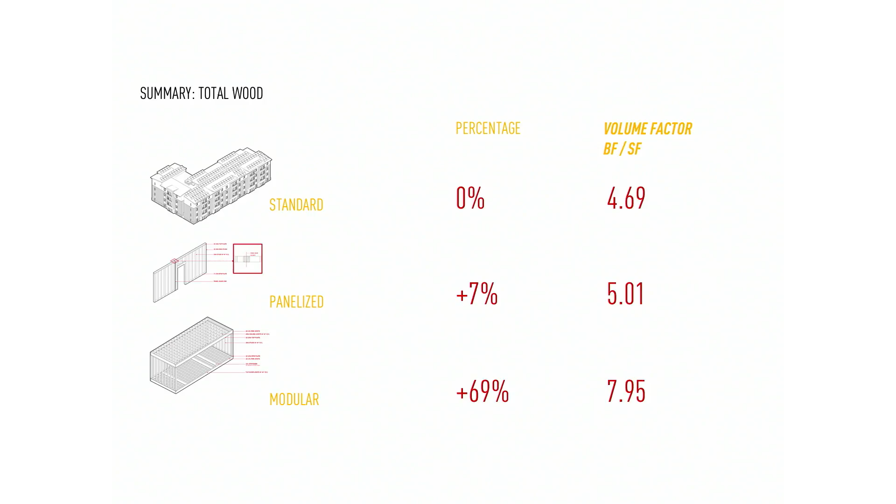We're now taking this and looking at carbon calculations, because we know that wood sequesters quite a bit of carbon, and seeing what the environmental benefit might be of using wood compared to site-built. We're also doing a cost analysis based on this as well.

I want to end with this. What are the opportunities for the wood products industry? Here's the major ones I had on my mind in the plane this morning.

Number one, there's significant capital investment in prefabrication currently. Marriott Hotels just announced that 15% of all of their mid-rise or low-rise product—think Spring Hill Suites, Fairfield Inn—all of that is going to be modular this year, most of it built right out of Boise, Idaho, here in the West. Amazon, Facebook, and Google have all announced they're going to use modular in their housing projects.

Katerra, which is a company in Phoenix, if you aren't familiar, you should look them up. They have a $250 million investment. They have grown from 8 to 850 employees in 2 years, and they're one of the premier multifamily housing builders in the West. They're fully vertically integrated, with architects all the way through to closeout.

Factory OS just announced today on Google, you can look it up, that they are going to take over the old Blu Homes Vallejo factory right here. And they are partnering with the Terner Center and the CED, and they're going to be exploring options. I don't think the machines will be in until December. I think that's an opportunity for this college to engage with research.

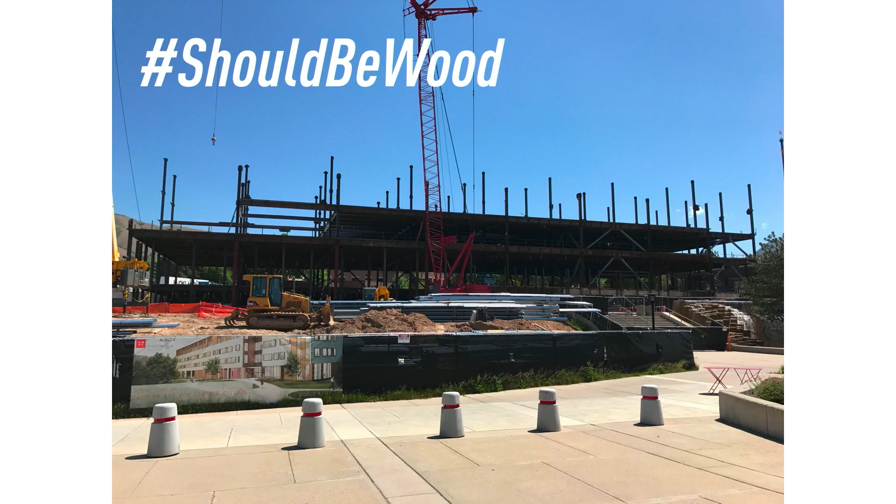Finally, I've developed this Twitter hashtag, #ShouldBeWood. Anytime you see a steel building or a concrete building that should be wood, take a photo and post it, okay? Thank you.

I think we'll do some Q&A if we want to.

You were mentioning the deflection in these cross-laminated timber panels. Are you referring to the glued or the unglued panels? Unglued, the one that we developed, yeah. Okay, glued is fine. Yeah, it seems to be something that should be very rigid if it's glued.

How about the increased use of timber, especially with the Title 24 requirements in California now? They're calling for extra thick walls in certain climate zones. That's going to call for a lot more usage of timber, and wouldn't that increase the prices of this raw material?

So maybe I can back up and just say, from the perspective of energy performance, what's happened in Austria in particular is CLT has become synonymous with what's called Passive House standard. Passive House is a very aggressive building standard. It's voluntary, but it is solely based on energy performance. And that's because you get a really tight envelope for air infiltration with CLT because of the glue. So they're able to do that and then put the insulation on the outside and get their values pretty easily compared to a cavity wall, whether it's a steel cavity wall or a wood framed cavity wall. So I think from that perspective, we do see locally the Passive House Institute in the United States pushing for CLT because they see it as an energy performance measure. And the added benefit is that you get low carbon in the building material. So that answers part of the question, but I'm not quite sure how to answer the question about cost increase.